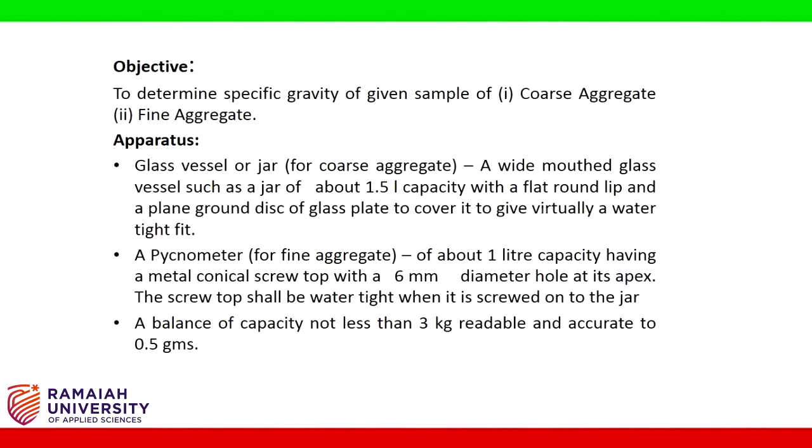Specific gravity of a material may be defined as the ratio of weight of known volume of the material to the weight of equal volume of water, both weights being measured at same standard temperature. This standard temperature is 4 degrees Celsius.

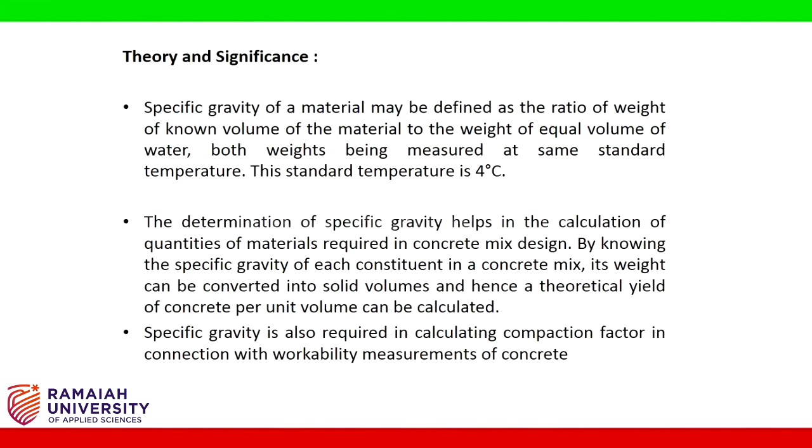The determination of specific gravity helps in the calculation of quantities of materials required in concrete mix design. By knowing the specific gravity of each constituent in a concrete mix, its weight can be converted into solid volumes and hence a theoretical yield of concrete per unit volume can be calculated. Specific gravity is also required in calculating compaction factor in connection with workability measurements of concrete.

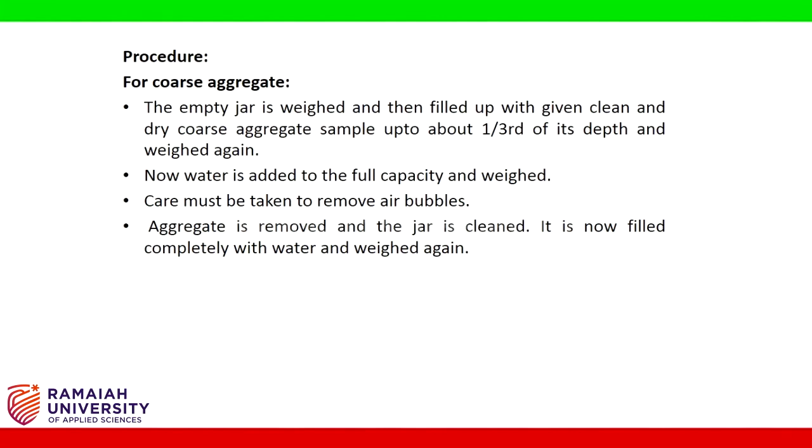Procedure: for coarse aggregate, the empty jar is weighed and then filled up with clean and dry coarse aggregate sample up to about 1/3 of its depth and weighed again. Now water is added to the full capacity and weighed. Care must be taken to remove air bubbles. The aggregate is removed and the jar is cleaned. It is now filled completely with water and weighed again.

Fine aggregate, that is sand. The empty weight of the pycnometer with conical top is taken. It is then filled up to about 1/3 of its depth with given sand, which must be clean and dry, and weighed again. Water is added to this fully and weighed again. Aggregate is removed and pycnometer is cleaned. Now the pycnometer is filled completely with water and weighed again.

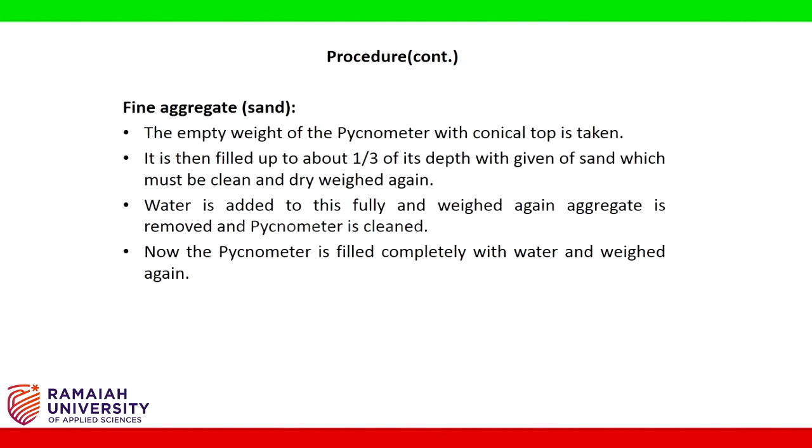Calculations and observations. Coarse aggregate. Weight of empty vessel W1 in grams. Weight of vessel plus 1/3 of coarse aggregate W2 in grams. Weight of vessel plus 1/3 of coarse aggregate plus water W3 in grams. Weight of vessel plus water W4 in grams. And specific gravity is calculated by the formula shown.

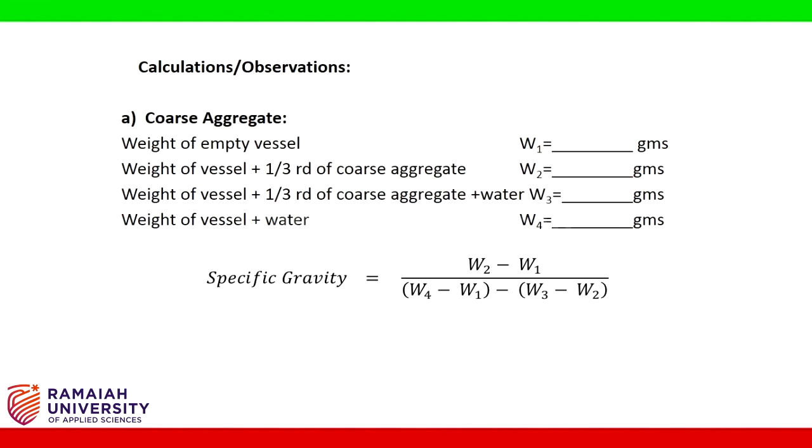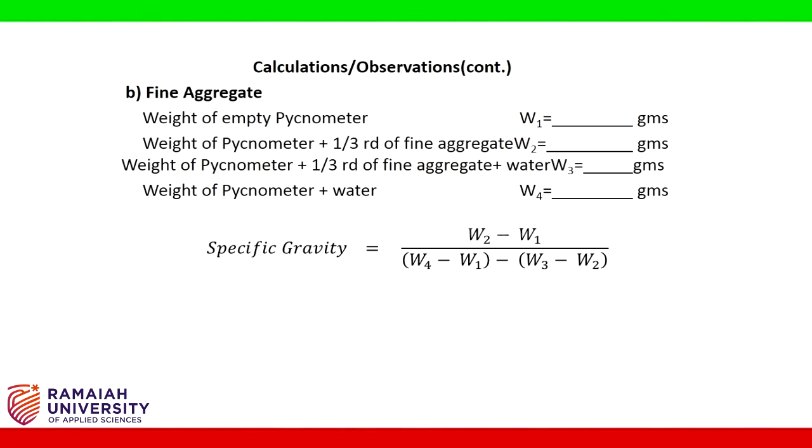Fine aggregate. Weight of empty pycnometer W1 in grams. Weight of pycnometer plus 1/3 of fine aggregate W2 in grams. Weight of pycnometer plus 1/3 of fine aggregate plus water W3 in grams. Weight of pycnometer plus water W4 in grams. And specific gravity is calculated by the formula.

Hi students, now we are doing the specific gravity of fine aggregates. So what do you mean by specific gravity? It is defined as a ratio of weight of any material to the weight of equal volume of the standard material. The apparatus required for this experiment is the electronic weight balance of 1 gram accuracy, pycnometer.

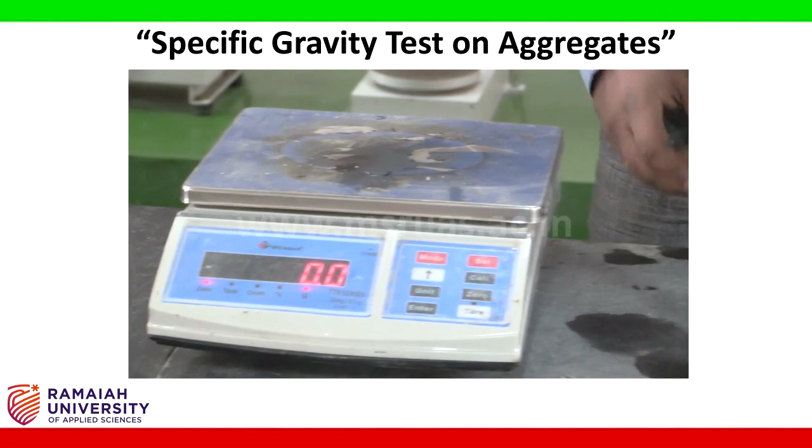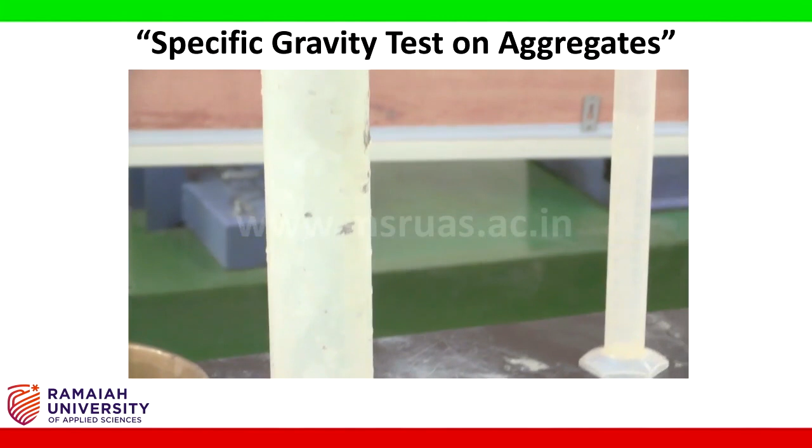Generally this pycnometer is used to determine the specific gravity of finer material. This pycnometer has 3 parts: one is a brass conical shape along with the rubber seal, a jar and a collar cap. Next, I have taken some quantity of sand and the water. Let's start doing the experiment.

First I am going to take the empty weight of the dry pycnometer. This has to be oven dried. I have taken the empty weight of the pycnometer. This weight I am going to note as W1 grams. After this, I am going to fill 1/3 of it with fine aggregate.

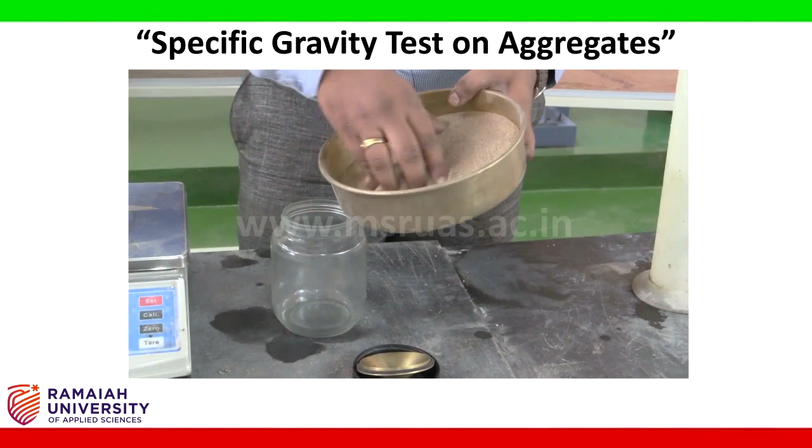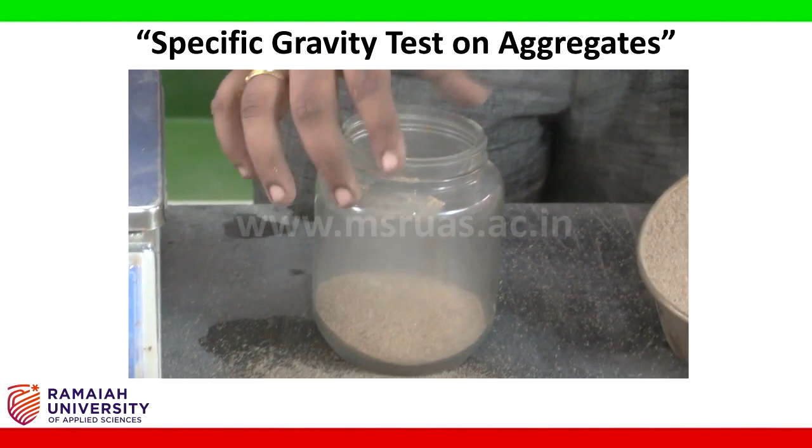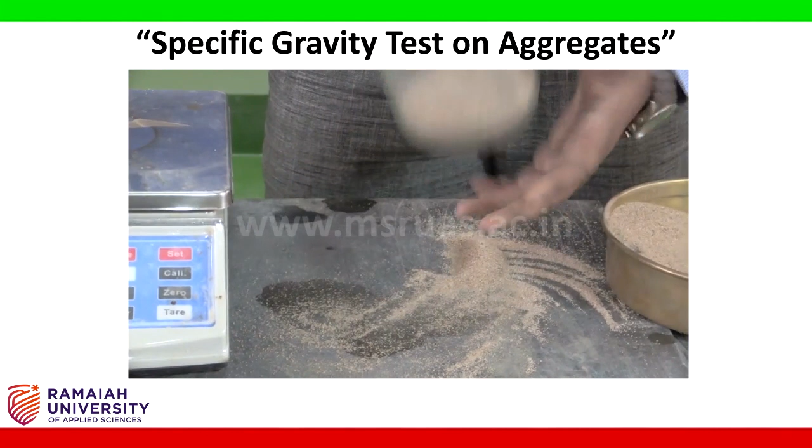Approximately 1/3 will be added. So I have taken 1/3 of the sand. I am going to fix the collar and the cap back, and I am going to take W2, that is the weight of pycnometer plus the sand particles. Next I am going to completely fill this with water.

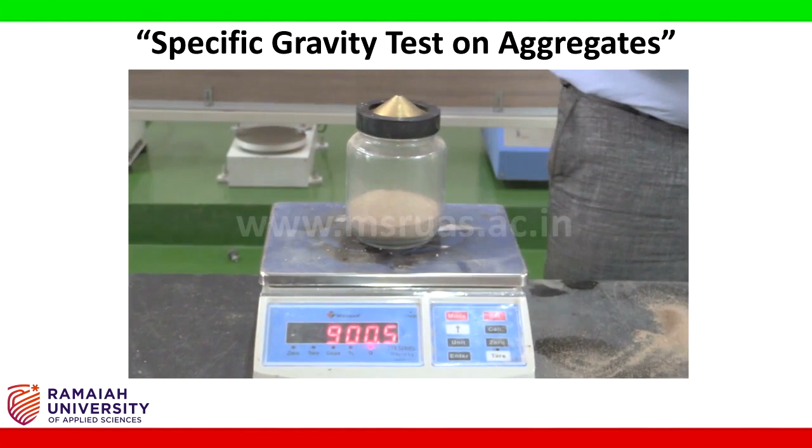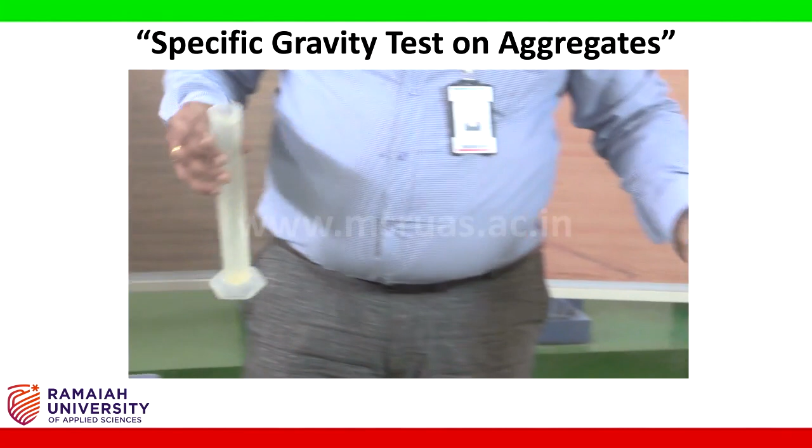So we'll remove the top portion only, with a measuring cylinder. So first, initially I'm going to completely fill the remaining portion with water.

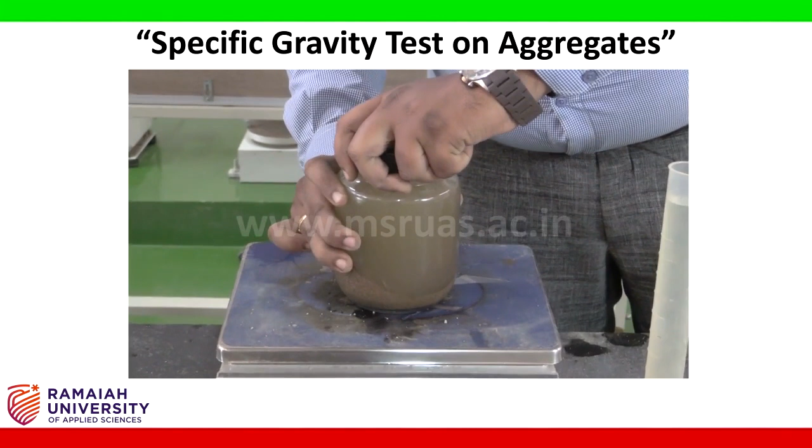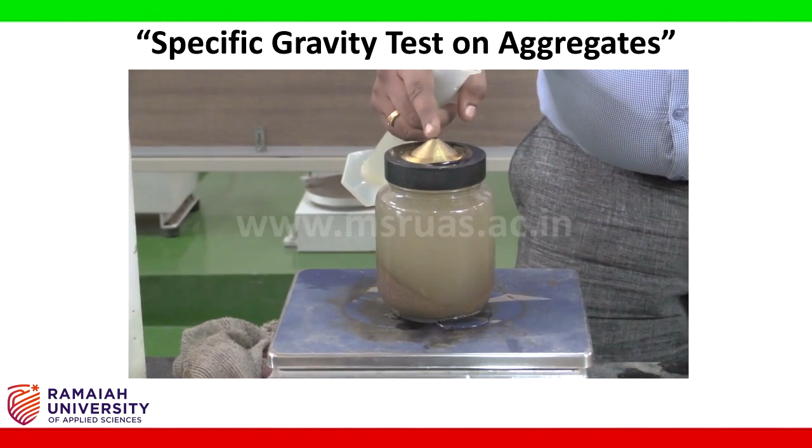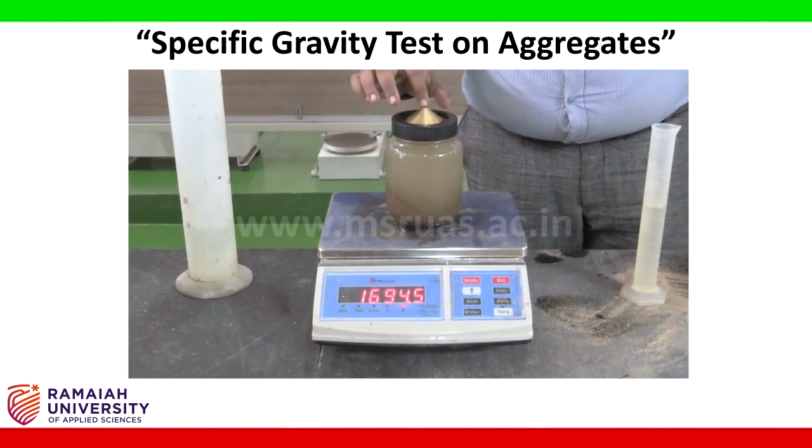So I'm going to fill up the conical portion with the water. I'm going to make sure that this conical flask is completely filled with water. I'll remove this excess water which is outside. Okay. After filling the tip completely with the water, I'm going to note down W3.

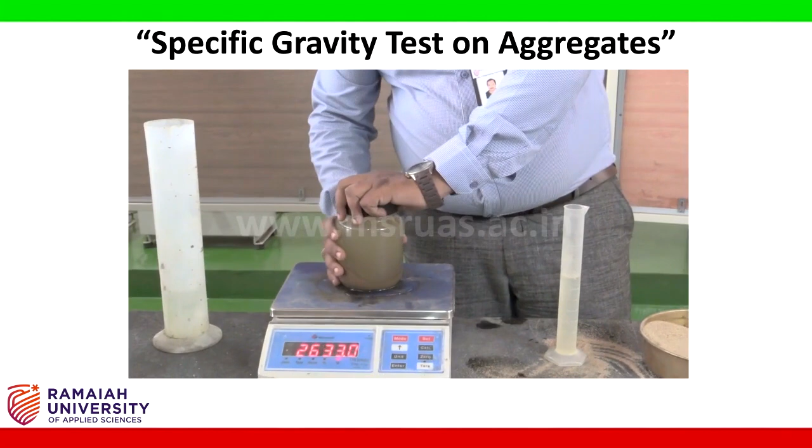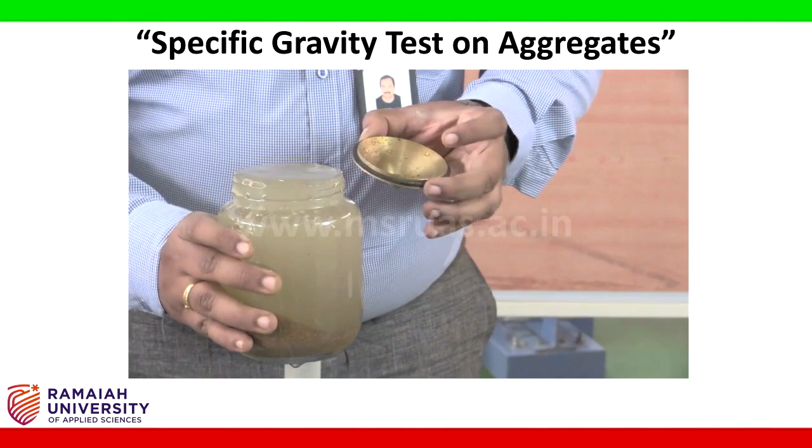Next, I'm going to completely throw away this W3 sample. I'm going to take the complete empty bottle, fill it with the water, and once again I'll take the weight. After W3, we are going to fill this complete container with water.

Fix the collar and the cone cap. Completely fill the remaining portion with the water. Okay, take down the W4 weight.

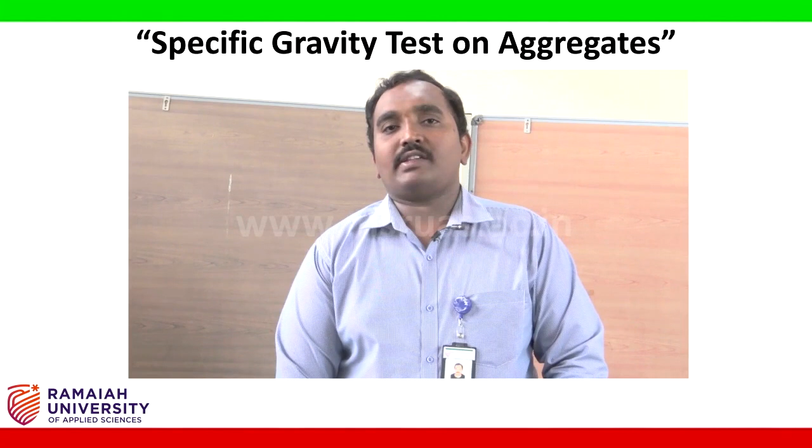By having these 4 weights, we can easily calculate the specific gravity of the fine aggregates. Generally it lies somewhere between 2.5 to 2.6. It depends upon the source of the fine aggregate. This completes the specific gravity of fine aggregates.